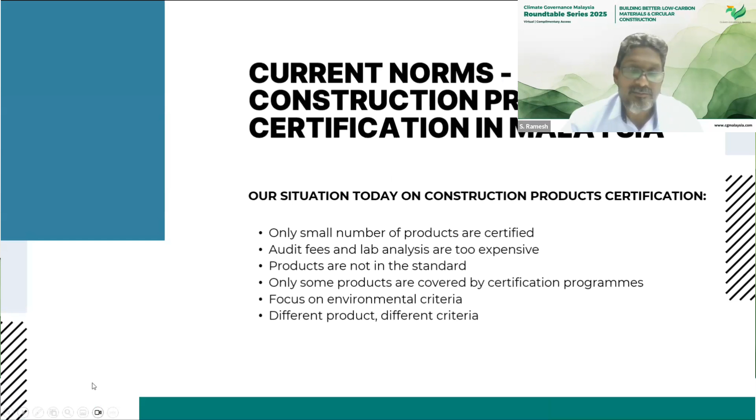Okay, so before that, we try to look into the overview picture of the construction product, where we are now.

In terms of certifications in Malaysia right now, there are many, but in terms of product certification, the numbers are quite small, because few products are being certified, and also the audit fees and lab analysis are too expensive, meaning industry players cannot afford to have their construction products certified. Also, there is no standard that specifically looks into construction products and certification programs.

So these are the things that arise when the industry looks at environmental and social governance, with focus on environmental criteria being an important element we need to look into. With different products and different criteria, there are some jumbled issues that we need to cater to one by one from the government side.

These are, I think, the quite pressing issues we need to solve starting from day one. So coming to these issues, CREAM as well as CIDB, together with industry players, have taken the step to introduce a green product certification that does not overlap with MyHijau or other certifications, but complements each other.

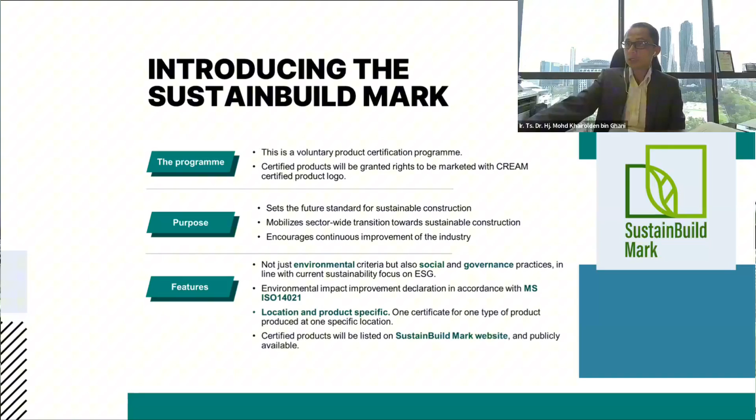So this is one of the initiatives we are looking for. The second one actually we look into the opportunities, a gap opportunity in embodied carbon. We are currently doing some studies that look into embodied carbon itself to support circular construction. Before that, we came out with some gaps and opportunities derived from fact finding from some of the studies.

We can see that in terms of local embodied carbon, right now there is no available standard. So these are some of the opportunities that we can look into. The second one is in terms of database. Database sharing is another challenge for industry players, because we have to rely on international databases, so it's quite limited in terms of a local database for embodied carbon.

In fact, we have done a few sessions with industry, and many of them say that getting the data is quite difficult to compile. So CREAM and CIDB come into the picture to help facilitate the embodied carbon database.

The third one is in terms of regulation. As of now, there is no mandatory embodied carbon reporting yet. So this is a time for us to look into some standards that we are going to develop, and also some incentives that the government tries to offer to the industry.

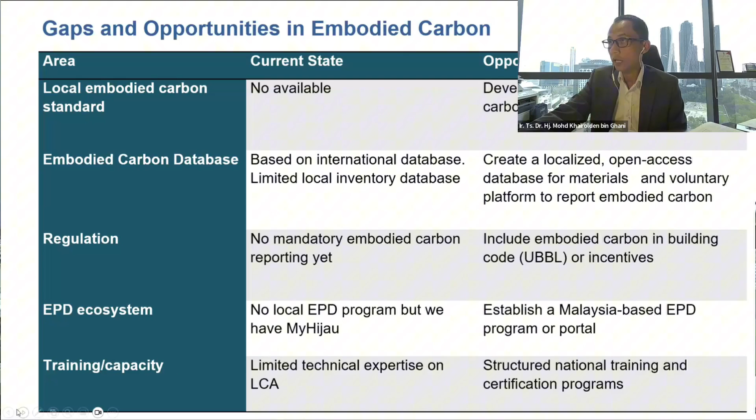So maybe not everyone is aware of this - CIDB has published what we call the embodied carbon inventory database since 2021. That embodied carbon inventory has been published on the CIDB official website, and in fact on the CREAM website as well. You can download it and use it as a reference.

Compared to the 2021 version until the version 2025, there's a lot different. We have just completed updating the inventory listing of data. Compared to 2021, where we had just 300 construction materials, as of now there is an incremental increase in numbers, now under 629 - almost double the increment in terms of listing of construction materials.

We can see that the construction material listing is progressing well in terms of numbers. In terms of building elements, in 2021 we managed to get 200 elements, but now we have more than 440 building elements, all completed already. We will update and upload to the CIDB platform for reference once we get the green light from CIDB. So the embodied carbon inventory data update is completed already in terms of all the information.

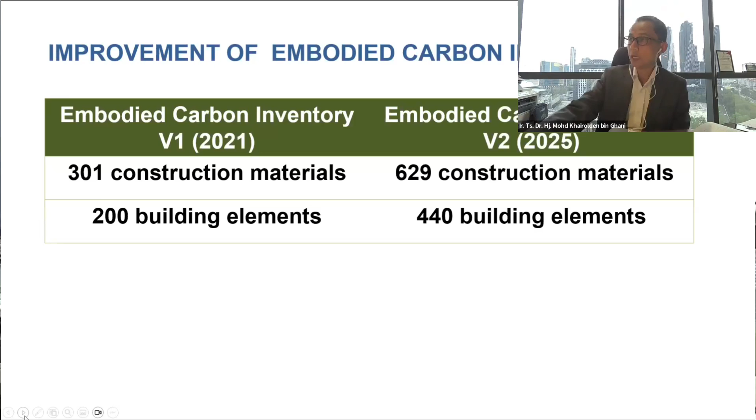Okay, let's go to the next one - some more of the effort that we have undertaken right now. The development of the embodied carbon calculator - right now the embodied carbon calculator is, I would say, the first of its kind in Malaysia, developed as a digital calculator.

At the end of this study, we will have a guide that could assist industry players to calculate how much embodied carbon is generated, just by clicking and inserting data from the database. Right now we are putting in all the codes, algorithms, for digitized calculation. This is in progress, and by end of this year we hope to complete this development, then get validation with the industry to see how it works. As for now, we have tested one pilot project and so far it's good to use.

We have also benchmarked with international bodies, for example the Institution of Civil Engineers and RICS, Royal Institution of Chartered Surveyors, to look into how they develop embodied carbon calculators. But as for now, their embodied carbon tools are just in Excel format. So in Malaysia, we are trying to digitize that calculation so it's more easy and user friendly.

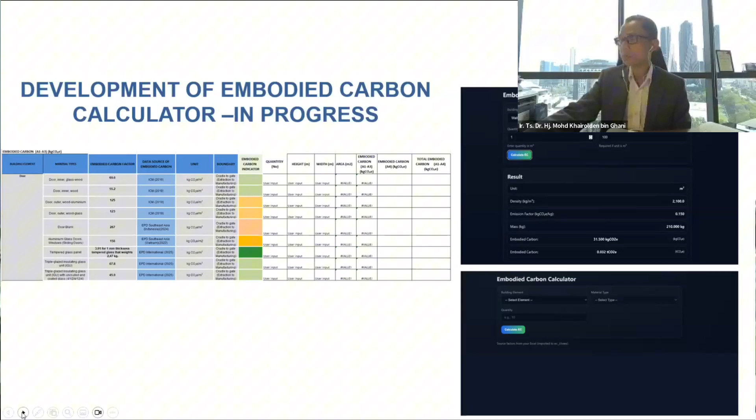So for the way forward towards circular construction, there are three things we need to look into. First, we have to accelerate green certification products across the industry. This is a journey, the voluntary scheme is not mandatory right now, so we have to promote the SB Mark, which is due to be launched end of this month during the International Construction Week at MITEC, Kuala Lumpur. This will be a milestone for green certification products, pushing the industry towards sustainability.

The second thing is to leverage the carbon calculator and waste data for better decision making. As I mentioned, we have efforts looking into embodied carbon, a few reports on greenhouse gases, the embodied carbon database inventory, and we're developing the carbon calculator guide. These things will help the industry look at the whole life cycle based on planning and material selection.

The third thing is to come out with some incentives. We do offer incentives for those registering for the SB Mark certification program, but we need broader incentives from the government itself to support the industry players with sustainability programs, waste regulation, and action plans. In terms of policy alignment, we have to align both the industry and government perspectives when looking at the strategy as a whole.

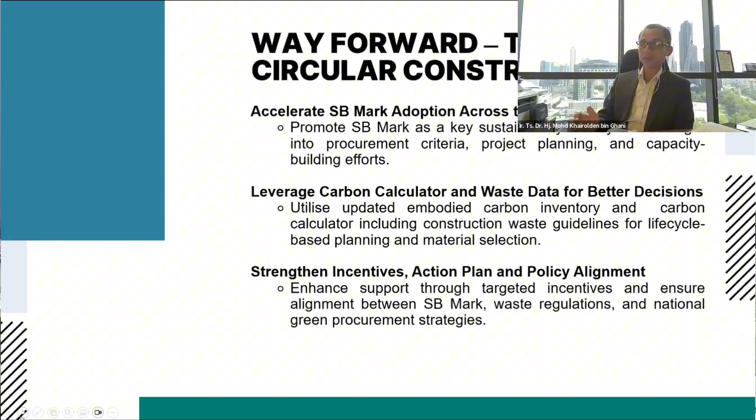So that's some overview of my presentation. I think that's all for my side, right, Ramesh? I hand over to you.

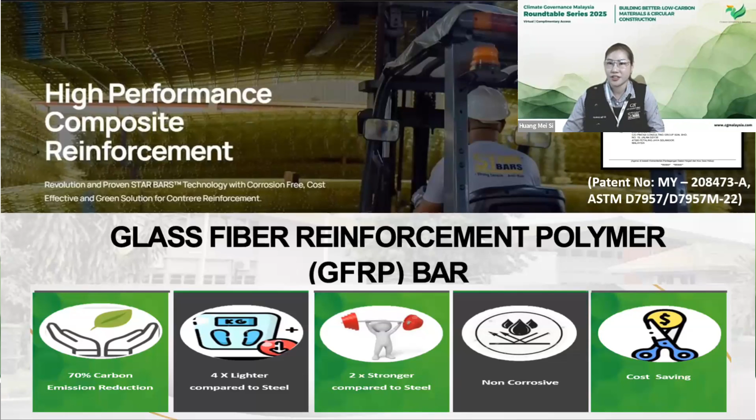Conventionally, this material is used in aircraft, high performance cars. Now cruise ships are a trend. If you hop on an aircraft or cruise, just take note - it is not made out of steel, it is FRP material. This material has been in the industry for the last 80 to 100 years, in construction for the last 50 to 60 years. That's why the code already exists.

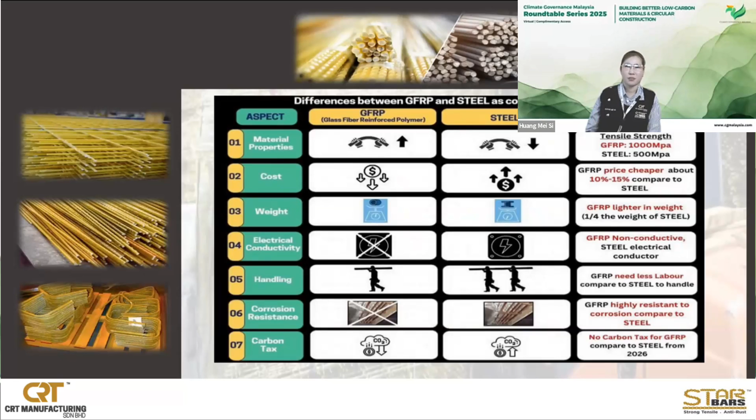Lastly, let's talk about carbon tax. Carbon tax is just the acceleration and incremental urge for us to reduce and help impair carbon emissions. So how bad is the carbon emission from the construction industry actually?

Construction industry accounts for 38% of carbon emissions, data by International Energy Agency. Concrete manufacturing accounts for 7%, and steel accounts for 6.7%.

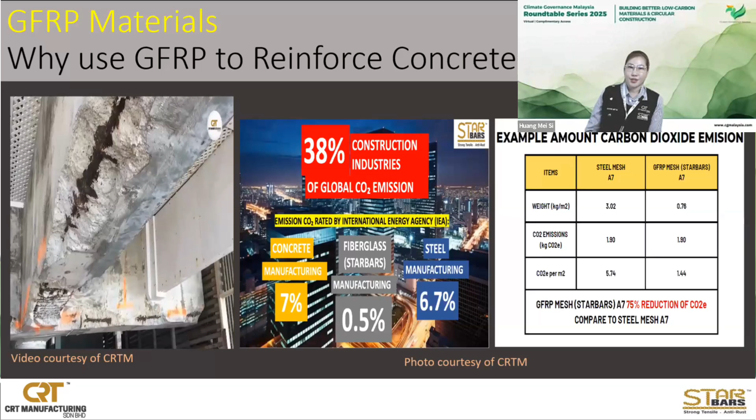Fiberglass has the lowest emission in the world - not just combating corrosion, but when it comes to carbon emissions, we have targets for certain industries. The biggest carbon emitters today in the manufacturing sector, for example, are steel and cement. We're talking to the Ministry of Finance, and the Prime Minister has already announced that next year we will start proposing carbon tax.

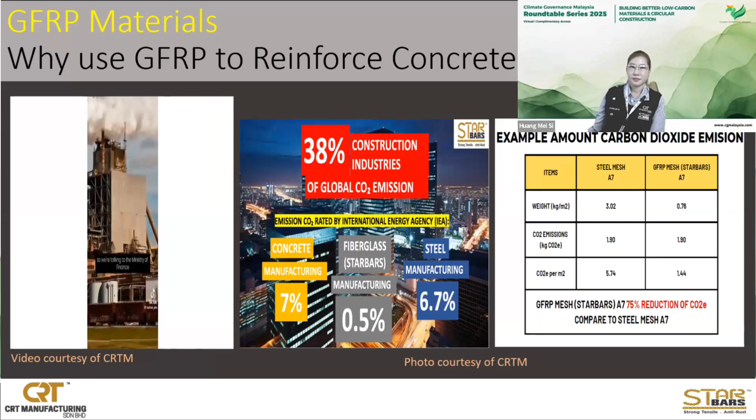So let's look at the carbon emission scope 1, the table on the right. If you look at the weight perspective, same size A7 - if your contractor terminology is common to you, A is a spacing of 200 by 200, 7 is the diameter, similar to other countries. The weight per piece, or kilogram per square meter, for steel is about 3.02. For GFRP Starbars, it's about 0.76.

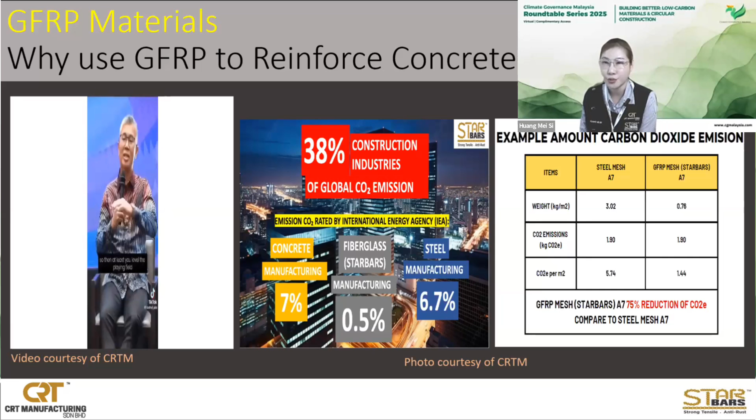If you look at the carbon emission per kilogram CO2e, steel and GFRP mesh both contributed 1.9. However, the 1.9 CO2e applies to steel for 1 piece, while the 1.9 for GFRP applies to 4 pieces. Therefore, if you compare 1 piece of steel to the same size GFRP, GFRP emits 75% lower compared to conventional steel.

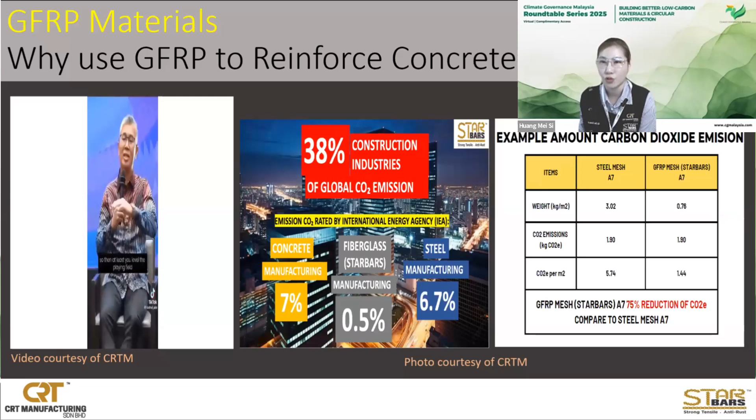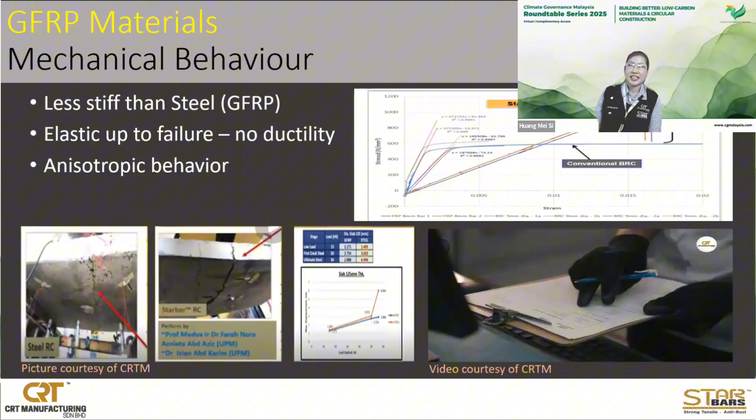This material, compared to steel, has lesser stiffness, low E values, and is linear elastic up to failure with no ductility, and is anisotropic. Looking at the stress-strain curve, the blue line is steel, which yields at 500, whereas the orange and purple lines are GFRP. The stress point is 2 to 3 times higher, but it isn't ductile.

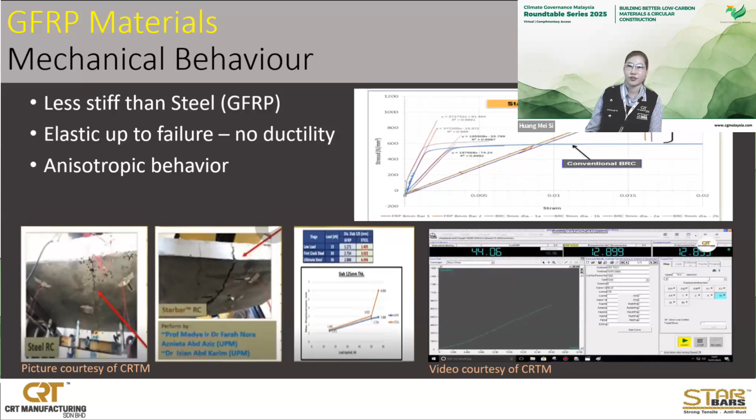If you have a lot of concern about this material's ductility and durability, let's go to the next slides. I need you to hear this video out.

This addresses a lot of the misconceptions out there. People are saying, hey, fiberglass rebar is brittle, it doesn't give you the warning, it doesn't do this, it doesn't do that.

But we have done a lot of testing. This test has been done at the University of Concordia. This is a simple beam, 16 feet span from center to center of the support.

This is a 300 millimeter, or a foot long, high regular concrete, 6 inches, with 2 pieces of number 5 rebar running at the bottom. We put this under cyclic loading of 2 hertz, 2 cycles per second. The loading on top is 25,000 pound force, or 110 kilonewton, which is 1.7 times service load.

This video has been recorded after 2 million cycles. We did the same test with steel, and it only lasted less than 20,000 cycles. See, 2 million cycles for GFRP versus 20,000 cycles for steel. This material performs 100 times better than conventional steel.

Next, we are talking about the application of GFRP into reinforced concrete. We have done this thanks to our supporters.

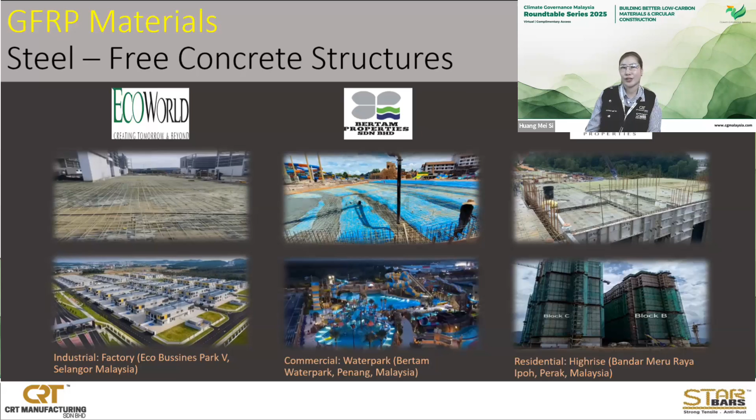This material is even more superior for marine chloride applications, de-icing chemical applications, more sustainable bridges, and electromagnetic transparency applications like MRI facilities or airports where radio signal disturbance must be avoided.

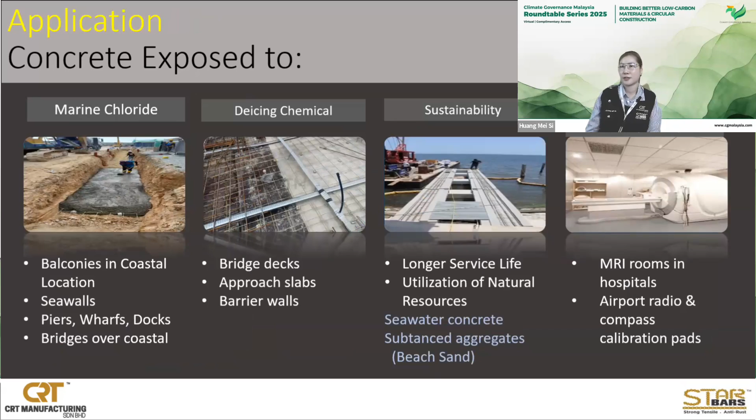This material is a good alternative to reinforcing concrete. Later I'll come to the codes and elements usage. You cannot just limit it to residential, industrial, or commercial. For those who build MRT, it can be used where your tunnel boring machine cores through the diaphragm wall, since it's easier to core through GFRP compared to steel. At the same time, my competitor MST rebar has used this in critical piling as well.

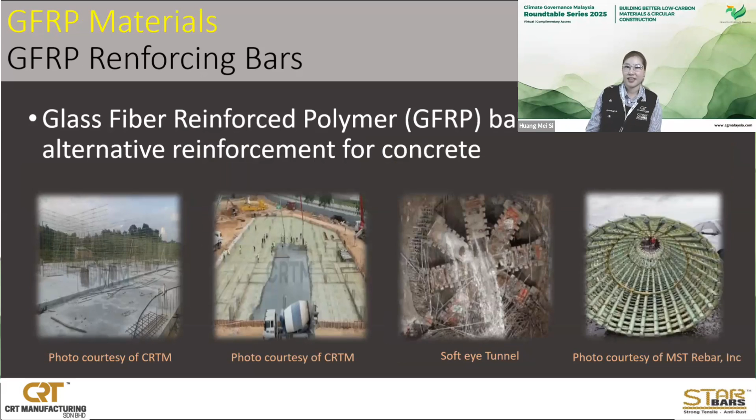Next, these are more interesting to you: cost savings, material to material, assuming the same sizes.

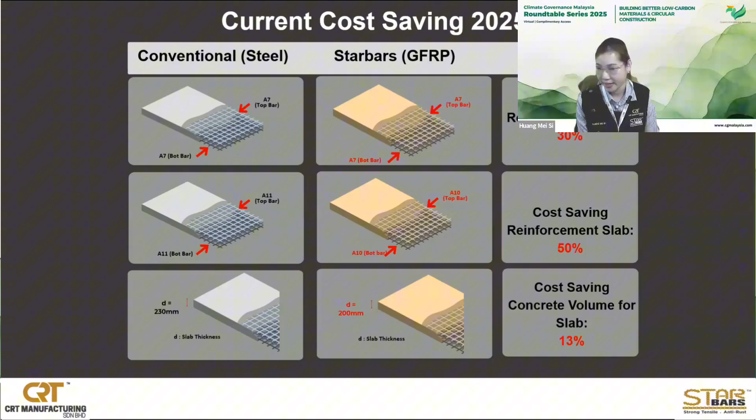Let's go a little more technical, the 3-legged compliance. This material, you need to have a product certification license strictly from SIRIM, ASTM D7957. If it doesn't have SIRIM certification, don't buy it, because this is the spec. ASTM D7957 has the necessary specification, testing, compliance, number of samplings, and audit requirements.

Then, dear civil and structural engineers, you need to comply with BS EN 1992-1-1 version 2023, not the 2004 version, because the annexes start from page 384. You are able to design this, or use the American code, specific code ACI 440.11, which is synchronized with the steel design code ACI 318.

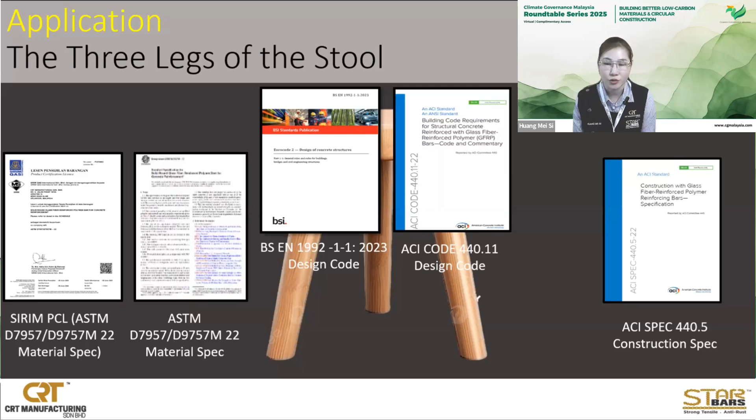For application at site, you need to comply with ACI spec 440.5. It's not like you can arbitrarily decide how much lap length you like, allow me to educate more. Conventionally, you're still using BS 8110, I know, and the old Euro code. When it comes to GFRP, you need to follow the new Eurocode.

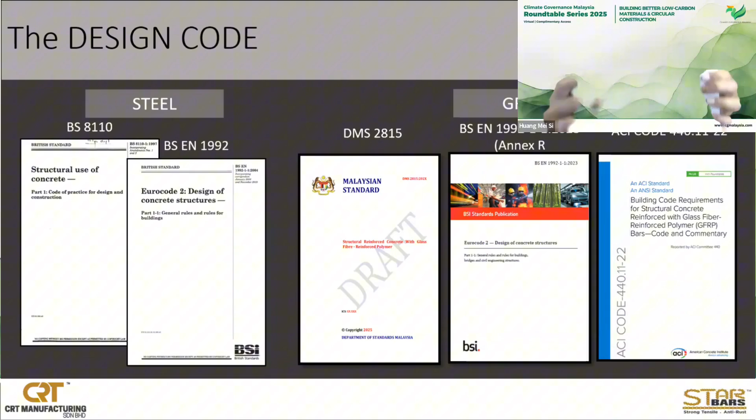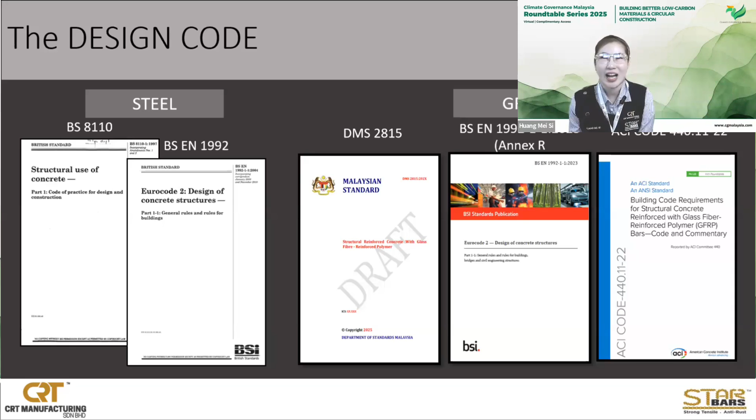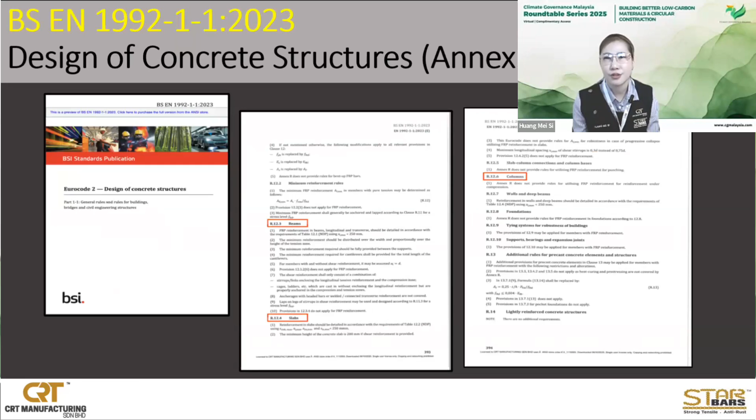So for Eurocode EN 1992, the latest revision, page 384 onwards, if you look at the design criteria, it covers all structures - beam, slabs, column, foundation, and so forth. If you go to the American code, most of the chapters, you have to follow the relevant chapter for the right design for the structural use.

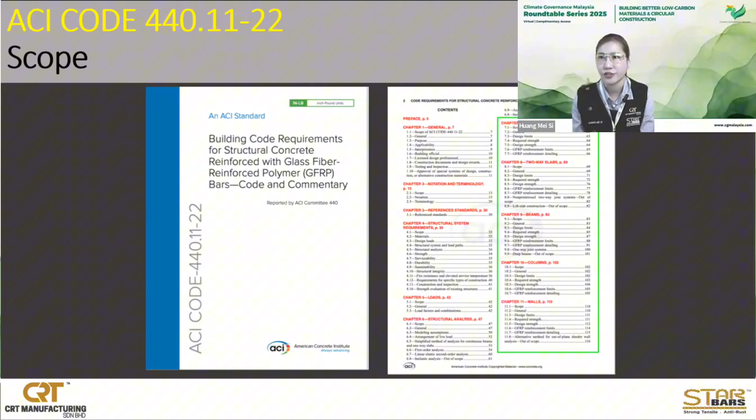So the construction specification, we need to strictly follow ACI spec 440.5, which will include strictly in our method statement.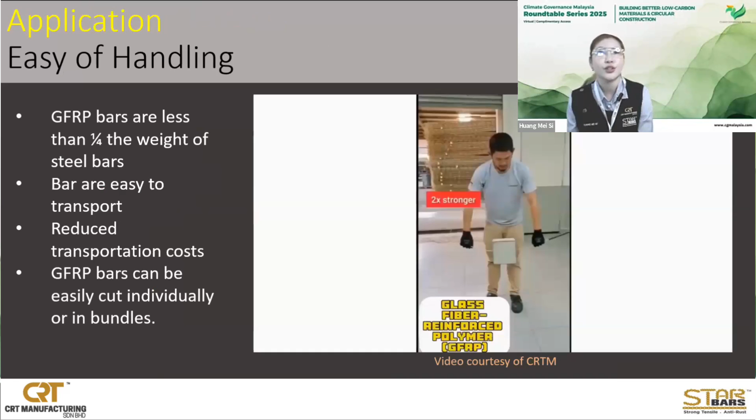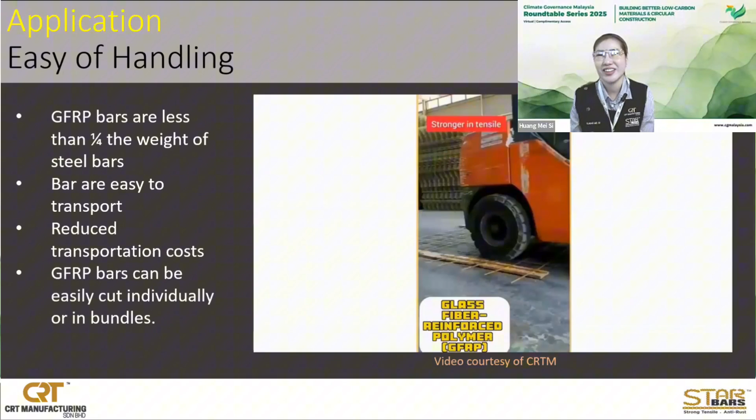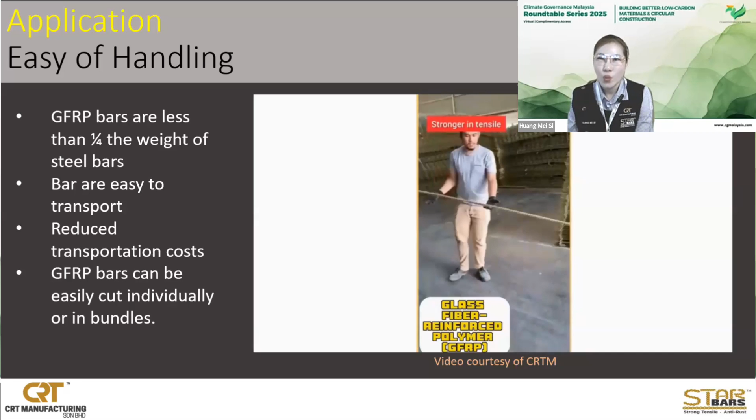So to ease handling this material, play the video. This material is a quarter of the weight. You can step on it, it's more durable, it bends and flexes back. So unlike conventional technology, it looks like plastic, looks rotten, but it's stronger than steel, easier to handle compared to steel. This is just to show you it sounds like steel, works like steel, no special handling needed. In fact, it's easier to cut as well.

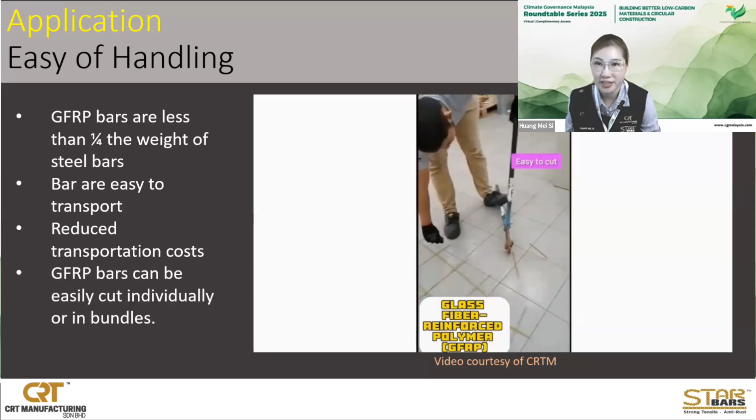So to reduce wastage at site, you can actually order cut to size from us. We will issue you the shop drawing. You can work on it, bend it, 2 people carry one piece. You won't see conventional steel able to do this. 500 pieces of BRC, British Reinforced Concrete, to unload the steel takes 2 hours. To unload GFRP, it takes only 35 minutes.

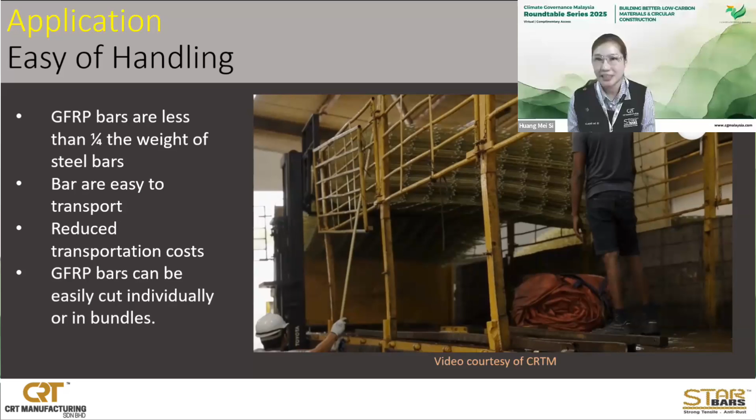So for storage and handling, this is from our actual site. Nobody is going to steal it anymore because they cannot commercially recycle it easily. However, with special processes, it can be recycled. So it solves one of the advantages that critically saves your pocket. Number 2, it does not rust or corrode at site, so you do not need to fear or worry the quality will impair at site.

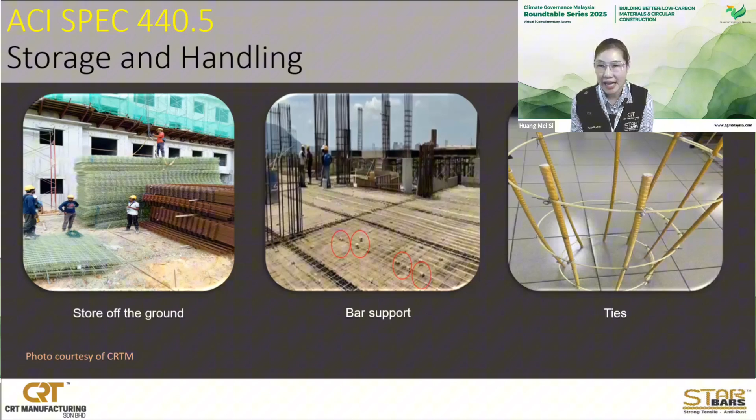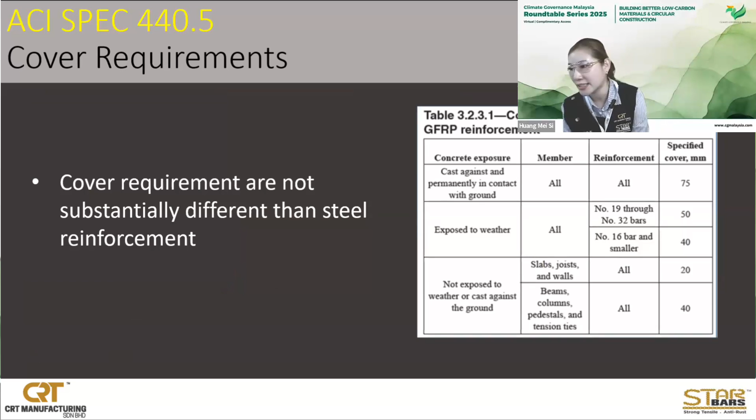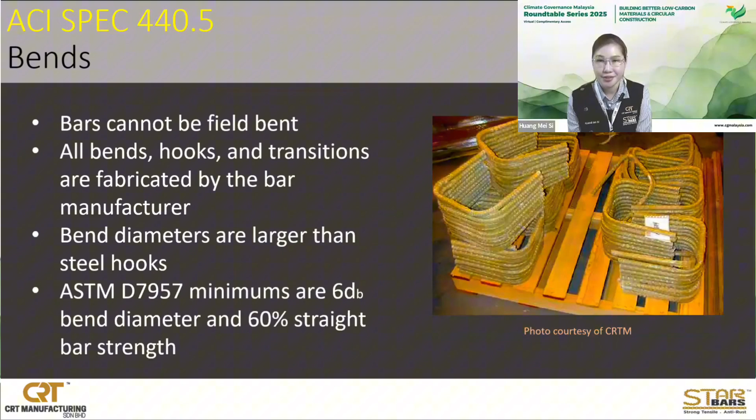The major difference is that this material cannot be easily bent at site. So in the present moment, sites are hybriding it with steel. So in areas that need a lot of bending, steel is still advantageous.

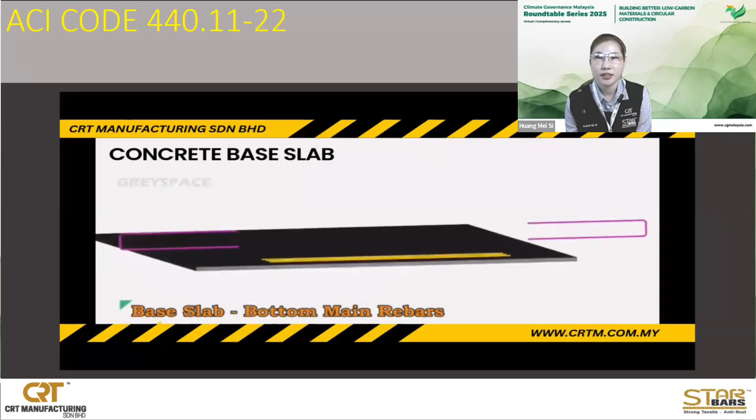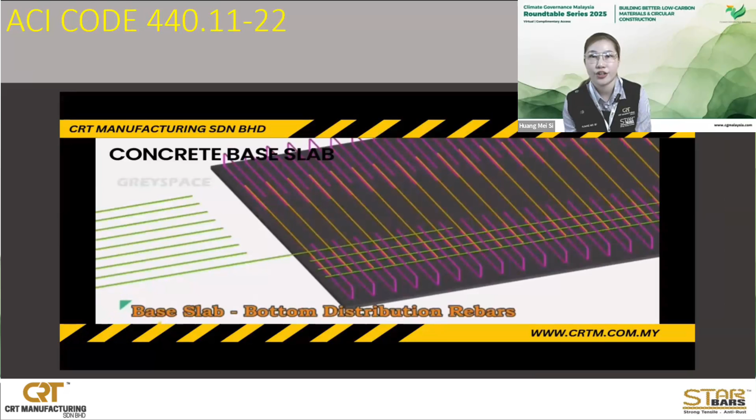So if you look at this video, the yellow color bar is the cross wire of GFRP. This purple color U-bar is made out of steel. So you cast it along your panel, and then there are distribution wires, which is the green color bar. Subsequently you pour your concrete. The green color bar can be GFRP as well. So only the anchor, T-bar, L-bar, C channel is made out of steel.

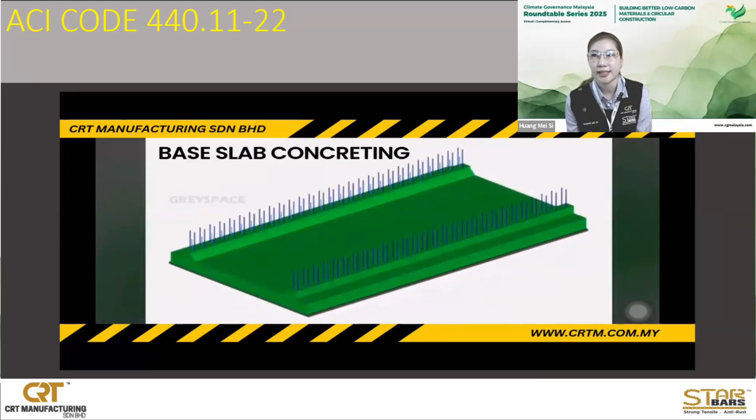The lapping requirement is still the same, 40 multiplied by diameter. You can tie with conventional wire tie. Next, designing with the codes - so this is just one example.

So if you talk about longevity or durability, if you compare the Eurocode steel design versus FRP design, you have to control crack control and serviceability well. You are able to have a concrete saving of 15% or reinforcement saving of 22%. For more detail of checking and design, you can participate either in IEM Negeri Sembilan next Tuesday, or 28th of November at the Association of Consulting Engineers Malaysia. I will give more technical calculations like this.

Fire rating is everybody's concern. So if you look at Eurocode practices, say 2 hours fire rating, you need 120 mm to pass. We tested at BS 476, 78 mm already passes 2 hours fire rating.

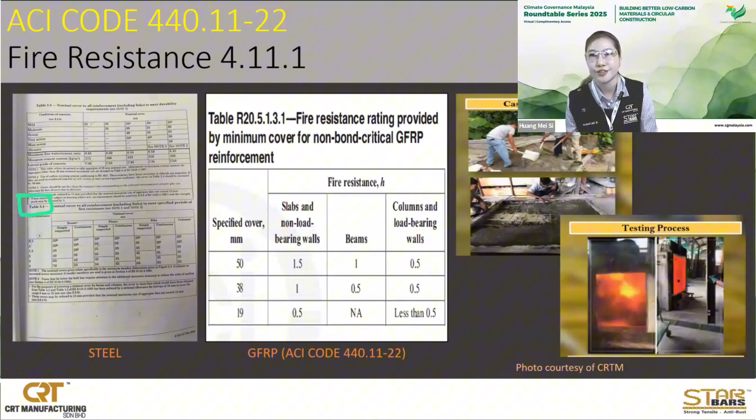Otherwise, refer to the code and the commentary. They are necessary and recommended, complying to the codes and UBBL for fire resistance design. Okay, next, maybe this rumor might cross your ear.

If this should cross to you, just give us a call. There are rumors outside saying that using StarBars now, after a while it cracks. Probably from what we observe from our sites in Tanjung Malim, Kapar and Subang, the area that uses steel, the left photograph, cracked all the way without loading. The area that uses StarBars, if you look at it, there are 3 stacks of pallets, 3 tons, and it's only derived minor surface cracks.

And there is another site that actually cracked at the slab. So we requested the site to do a coring test. The core results came out, the concrete strength did not achieve the design strength, and also the thickness did not achieve it, about 30% off. So mainly, this was primarily due to workmanship.

But StarBars is okay. Should you come across any of these in the future, do give us a call. We can arrange a private session to verify and clarify these things to you as well.

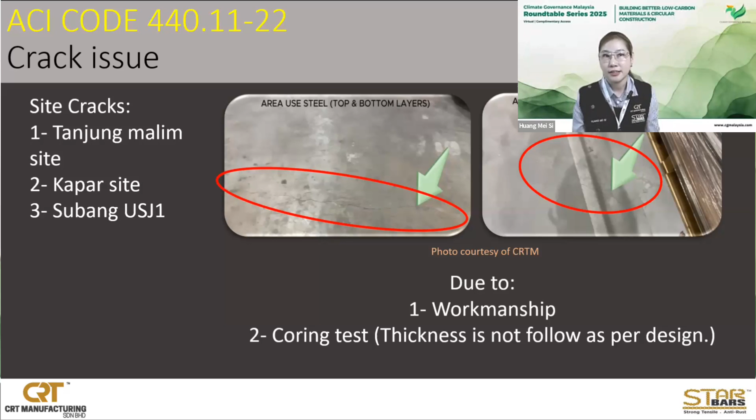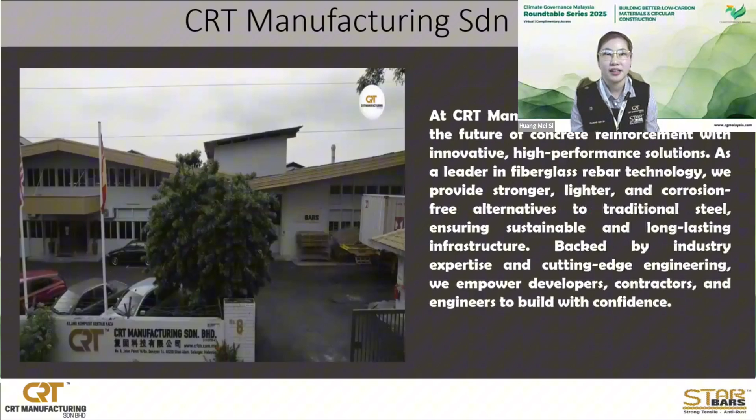So next, CRT, Composite Revolution Technology. This is our manufacturing plant, one and only in Malaysia, Section 16, Shah Alam. Standard sheets, this is what you see. We can do cut-to-size to have no wastage for you. So this material is very lightweight.

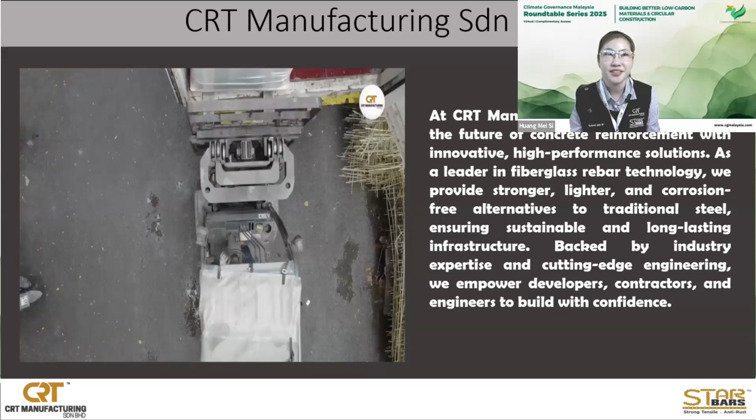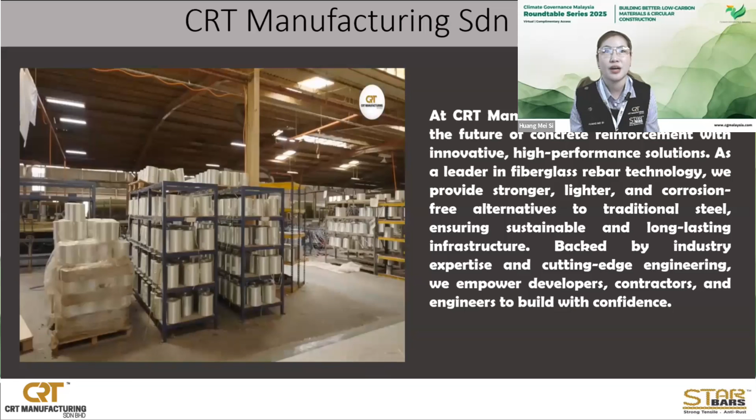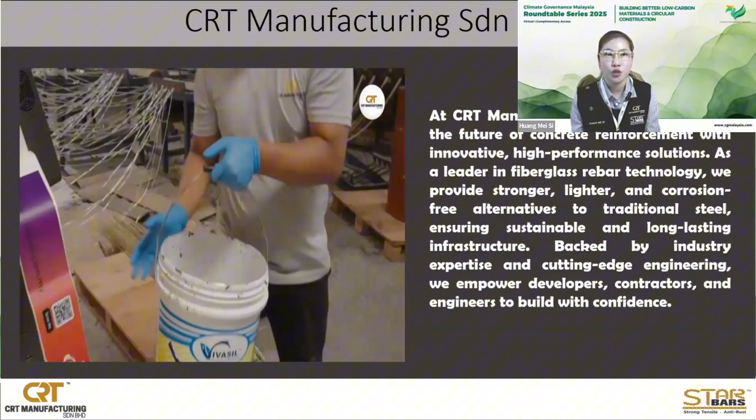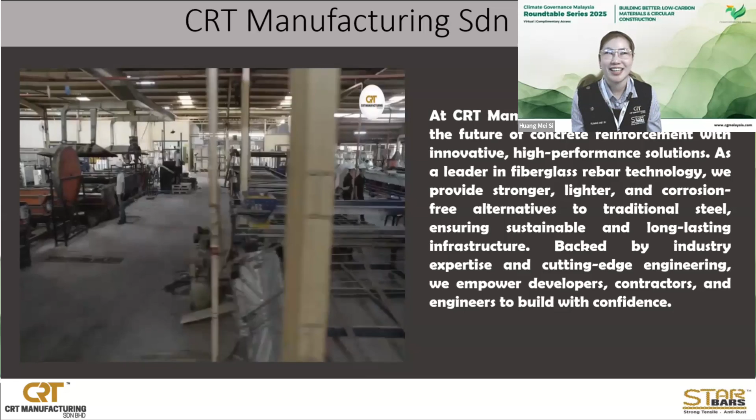So this is our process, real processes. Actually, I wanted to do it live here so you guys could see it in real life, but it's okay. You've got our contact, arrange a private session with us, and we can bring you around as well.

So these are our matching processes, directly from the raw material to the end finished goods. So probably a piece of these standard sheets, we do it faster than your A3 printing in your office.

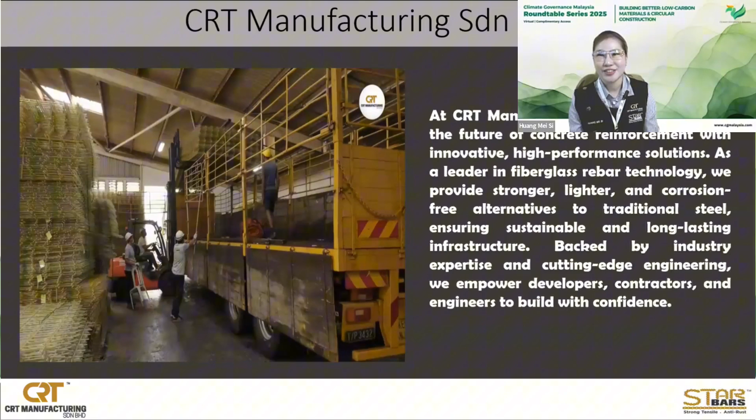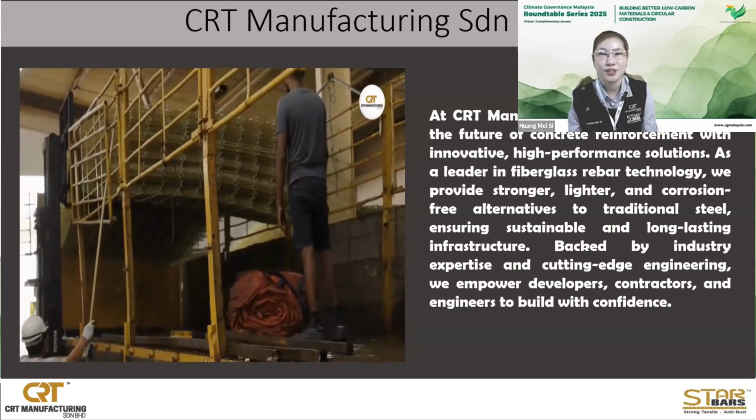Next, so for this material, we have sufficient green certification: MyHijau, CREAM ISO 14067, MGBC, GBI, and a recognition token from GreenRE. For product certification, we have 2, both from SIRIM. At the same time, we are locally patented and MySTI, which is enacted in the new Pekeliling to encourage the adoption of local design products.

We are not OEM from any first world country. As I mentioned, I'm one of the inventors in our team. Do support us as a local invention and commercialization.

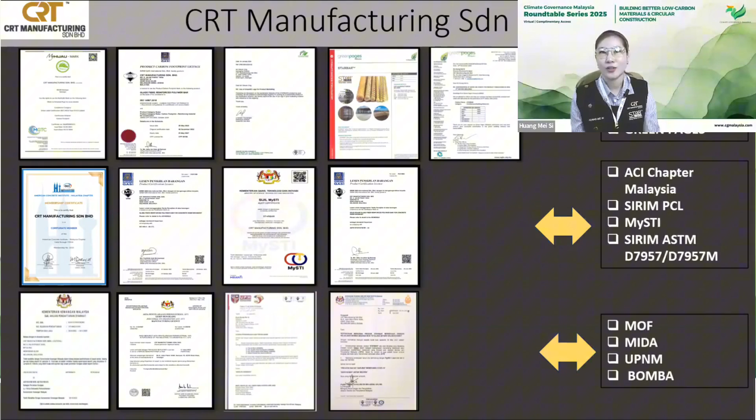Next, so to use this product, thanks to CIDB for the good support. If today you Google CIDB Starbars, you are able to see us on the website, and some of their workshop tours, you can see I'm one of the speakers. I know the photograph looks different from me, that was me many years ago. So this is the letter supporting us by CIDB.

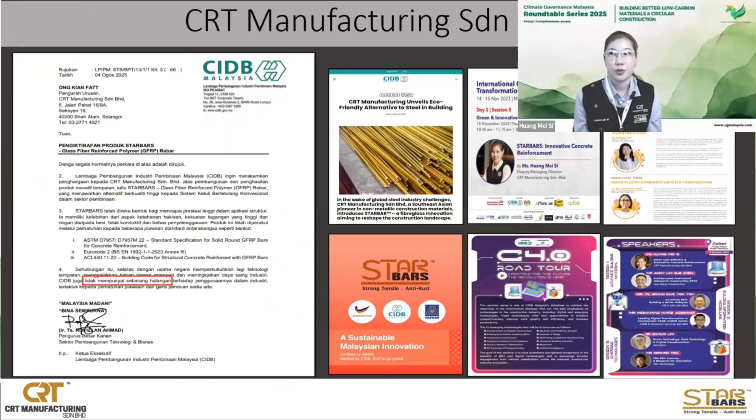At the same time, all the technical workshops we conduct are through the Institution of Engineers Malaysia, Board of Engineers Malaysia, Institution of Civil Engineers Malaysia, upcoming Association of Consulting Engineers Malaysia, as well as Surveyors Congress, to have the right quantification and costing.

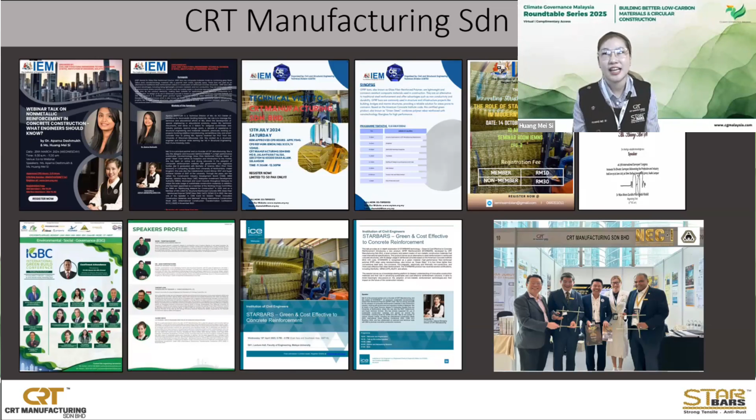Principally, that's it from my side. I'm a co-founder and one of the inventors for Starbar. Here is my contact, feel free to drop me a WhatsApp or give me a call at any time. I should be able to feed you the right information the soonest I can reach out to you. Have a good day. Support local technology, support Malaysia, let Malaysia pioneer for the world. Thank you.

I just wanted to wrap up saying, you keep on saying 'let me educate you.' Yes, indeed, it's educational, informative, and a very technical talk from you. I pick up this: it's an alternative material, Malaysian made by Malaysians, made in Malaysia by Malaysians, and you keep on marketing that. I think it's a timely reminder that we have alternative material. Thank you for that sharing. I can feel your little bit of pain. Maybe we can share later on.

No, because I can feel that pain. Why keep on marketing it? It's Malaysian made. Why don't you guys look into it?

Thank you for that sharing. I felt like I went for some engineering classes for a while, looking at all that. Thank you, ladies and gentlemen. I know we are on virtual, but do give a round of applause for both those speakers.

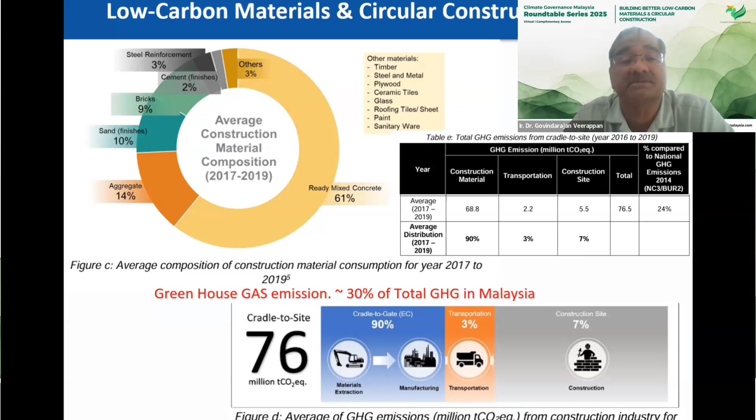This is what they call cradle-to-site and all that, out of which I think 90% actually comes from construction materials. I think that's why they emphasize low carbon and circular construction, because that's how you can minimize these gas emissions.

Having some problems here—okay, globally everyone can Google this and find out. But the point I'd like to make is that cement production, the main component in the construction industry, the manufacturing uses almost 2% of world energy, producing about 5 to 8% of CO2 emissions.

To give a figure, 1 ton of cement production requires 2.7 tons of raw materials and 124 kilowatt hours of power. That's a major component of materials in the building and construction industries. So basically, we need to find materials that can produce low carbon, and circular construction plays a very important role in ensuring materials stay within the same loop for reuse.

So the table below here gives an idea of major construction materials. I think Ms. May already elaborated on the steel reinforcements and CO2 emissions, so I don't want to repeat that in detail, but focus more on the concrete industry and how we can minimize emissions. Earlier I mentioned some say 5%, but it's actually in the range of 5 to 8% of CO2 emissions produced.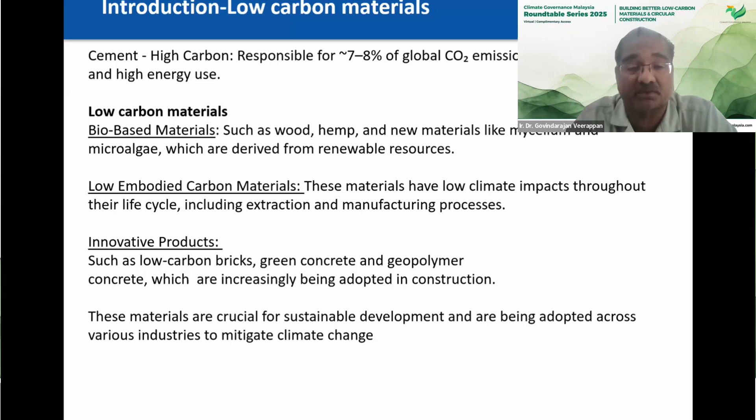If you can produce 200 megapascal compared to the conventional 30 to 50 megapascal, obviously you can reduce the thickness of the materials, and the industry will directly benefit. I think Dr. Khairolden did mention a good effort they're putting into the calculator.

But I just want to show these two figures to show what conventional cement actually produces in CO2. It's about 0.74 kg of CO2 produced for every kg of cement. Compare that to GGBS, ground granulated blast furnace slag, a byproduct of steel - that's only about 0.083. So you can see the difference.

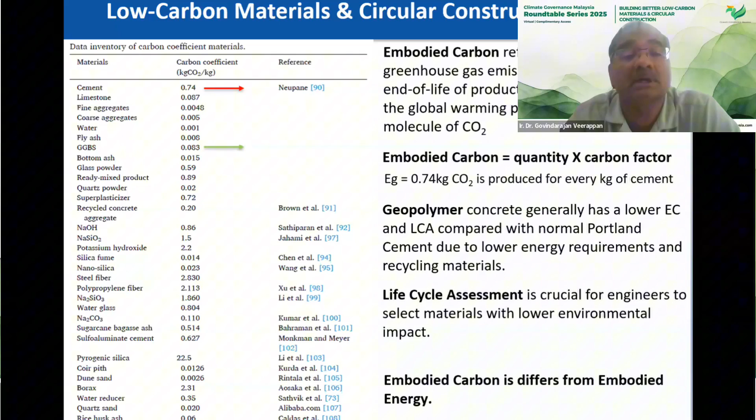So these are the materials you need to combine to have a sustainable or low carbon cement. Why low carbon construction materials? I think the earlier speaker also spoke about this in depth - different materials, if you can recycle or reuse them, combinations of materials will definitely benefit the entire construction industry.

I think the new regulations are interesting too. About last week I was listening to BFM and they were talking about the carbon tax they're going to implement next year. I'm sure moderator Mr. Ramesh can elaborate on that. We're all very eager to know how they're going to impose this carbon tax, which in a way is a very good move, because without enforcement or regulations, I think we will never move into sustainability.

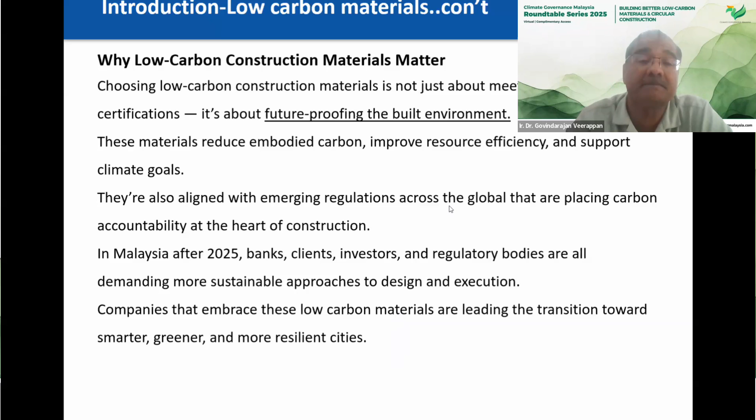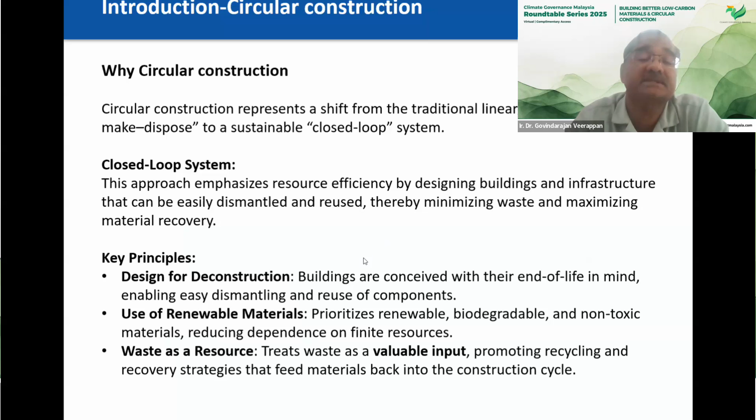So these combinations of low carbon materials and circular construction are all tied together. If these two things can be utilized by the construction industry, a lot of things can be minimized, even waste going to the landfill - some byproduct materials that are currently dumped can be reduced, giving us a cleaner environment.

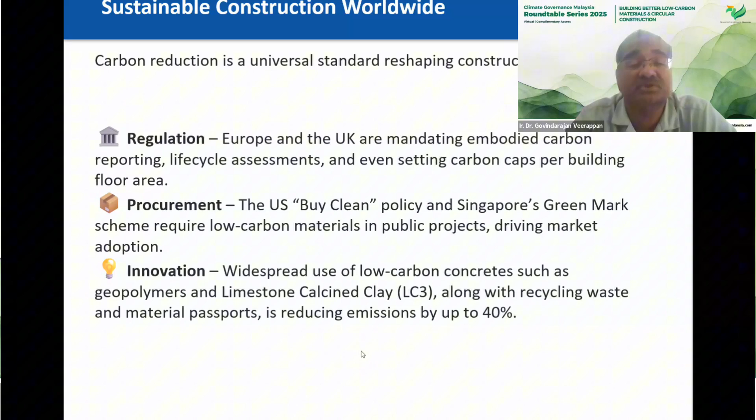Now I'm going to brief a little bit on my research. The development of low-cost, low-energy cement, where we use waste paper sludge ash, a byproduct from the paper making industry, combined with GGBS, ground granulated blast furnace slag. We blend this into concrete products, then introduce some other materials.

So why were these materials selected? Before I even started this research, some research was carried out by my University of Glamorgan. One of the things is that the paper manufacturer collaborated with the university to find an alternative for these products, because there's a huge tax imposed to dump them.

For example, in the UK, 5 million tons of waste paper ash was dumped in landfill, and they have to pay a very high amount to dispose of this material. So they are forced to find alternate products to utilize. That's how the research came into the university's mind.

End of the day, this research is not very straightforward. Many people ask me what I'm doing for 3.5 years of research in this. Actually, for any product to come to market, you need very extensive R&D and test results to prove that this material is good in strength and durability. That's what we've been studying throughout my research.

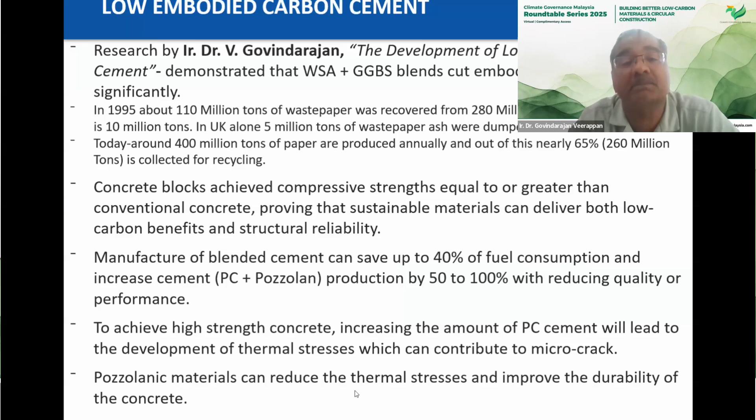Many times the concrete actually cracks in the early stage during the setting time, but that's not noticed. If you're not noticing, the micro crack becomes larger and larger, and one day the cracks become serious to the structure.

For some of you industrial engineers, you'll understand what this slide is about. The pozzolanic materials themselves have two divisions: one is natural pozzolanic, another is artificial. The natural is volcanic ash - pumice is one of the best natural pozzolanic materials. The rest are fly ash, GGBS, silica fume, our waste paper sludge ash, rice husk, and palm oil shell.

Rice husk and palm oil shell have been utilized in research by our local industry. Professor Dr. Manan used to be at University Sabah, then moved to University Sarawak. He has done quite a lot of research on these products as well. We are working on alternate materials, and some universities are working on this too.

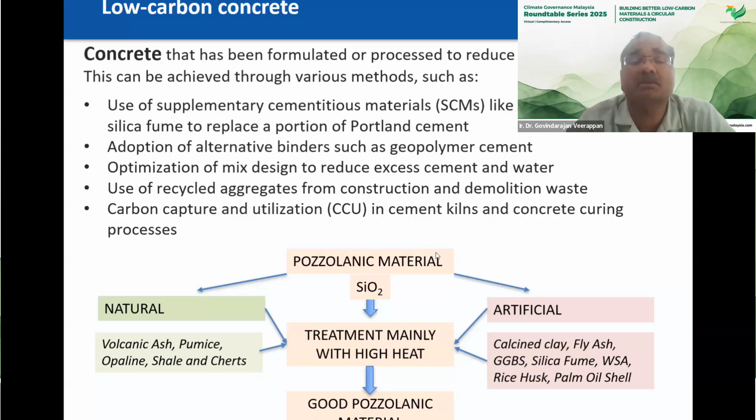The combination of these materials with Portland cement becomes a geopolymer - that's the new revolution type of cement we are using. The chemistry and mineralogy go back to three main components: calcium oxide, aluminum oxide, and silicon dioxide. The proportion of these will give you rapid hardening cement, sulfate resistant cement, or high alumina cement - everything comes from this triangle mineralogy of cement chemistry.

Those who want to know more on this can contact me separately after this - I can give you a lecture on it. That will probably take a few hours.

So I'll move on. Interestingly, when I was doing my research in the UK, the Second Severn Crossing, the connecting bridge between England and Wales near Bristol - the concrete they used to support the pier was actually 70% GGBS and only 30% PC.

Imagine, I'm talking about 1996 actually. This is the year I graduated from my university.

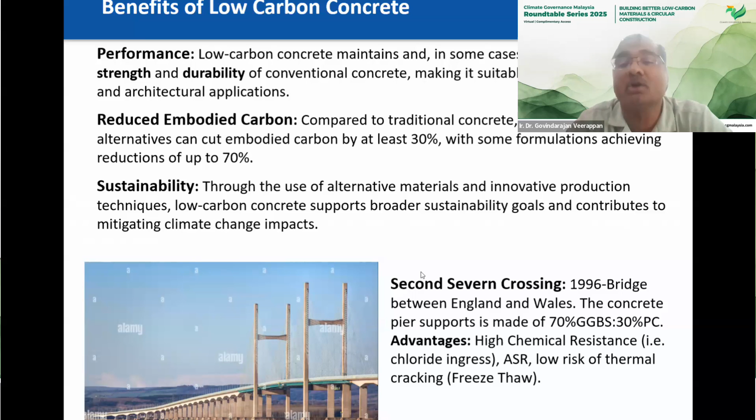So the use of this sort of low carbon cement has actually already been used elsewhere, and it's superior in terms of chloride resistance, high chemical resistance, also ASR, alkali silica reactions, and it's very important, it has a low risk of thermal cracking, what in the UK or Europe we call freeze-thawing. That means the temperature drops to minus, and then the summer temperature goes to 25, 26, or even 30 nowadays. So the concrete should withstand all these kinds of tests, I mean all kinds of environment, industrial environment.

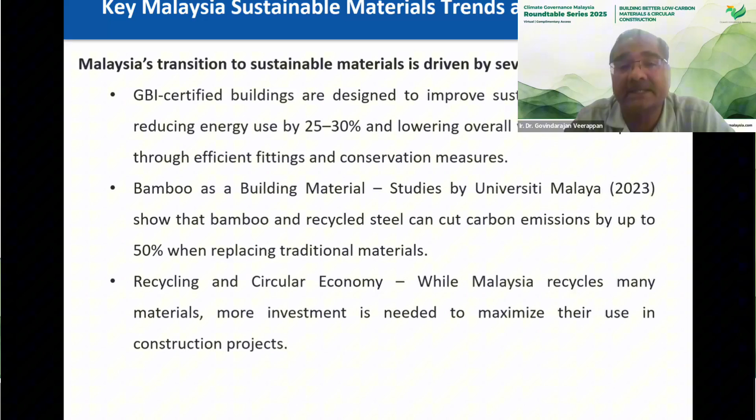Now, I think Dr. Khairolden earlier already talked quite a lot, or at length, on this in terms of Malaysia policies and all that. But I think we are there. I think they are working on some papers in terms of lowering the ground, I mean green building, greenhouse gas, and the studies are also utilizing bamboo and recyclings being studied elsewhere. Yeah, that needs to be continued.

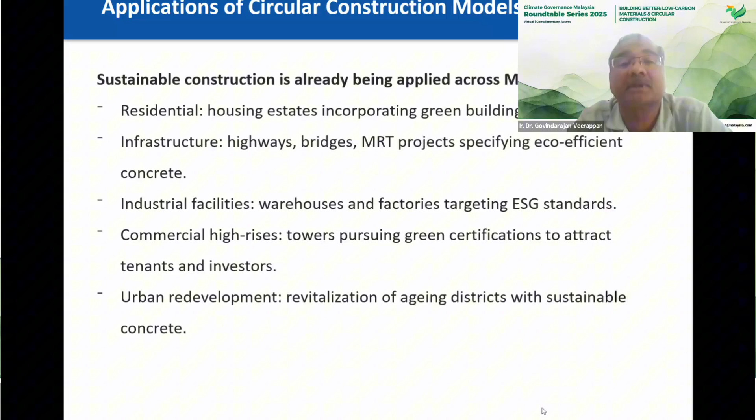So I think the challenges, again, I would say based on my experience, in order to make sure that the industry or the players use this kind of materials, there must be some formula to be, in a way, incentivized, or a little bit forceful to the industry to make sure that they use it, which is banking actually, using that formula. I think some sort of marks or assessment will be given in order to secure some loan from the banks if they have this kind of implementation in their companies.

And also I think without research by universities and all that, we may not develop, we may not go in depth.

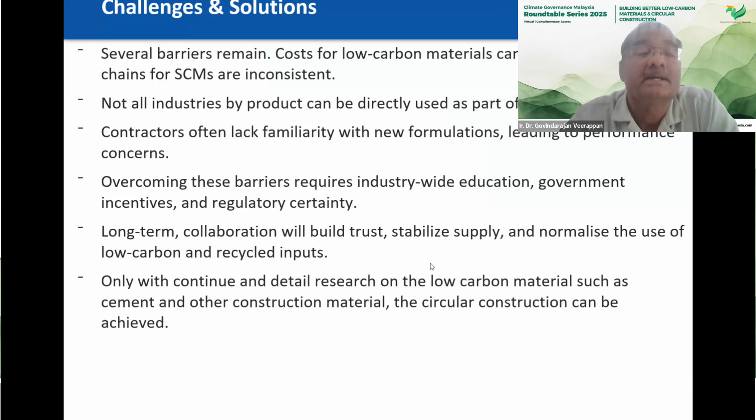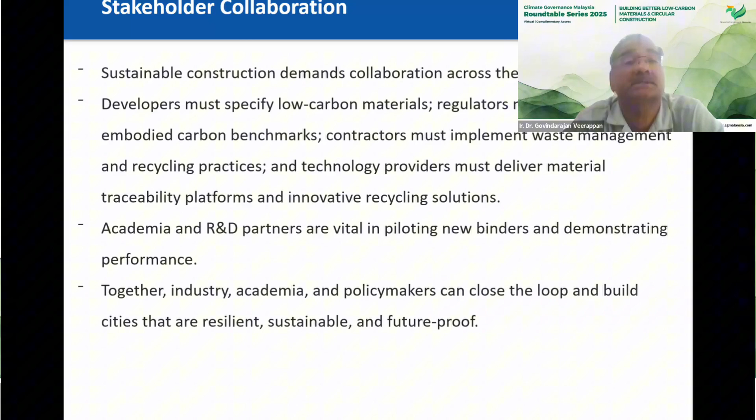Okay, so I think, like I said earlier, the stakeholders play a very important role here. They must join, or they must allocate some of their revenue for R&D collaborations with the universities, and of course they can have whatever invention, they can have a patent, and they can always market it, like Ms. May was doing. I think we need more of this kind of industrial players to come forward into low carbon and circular constructions.

So now I think one of the things that I picked up from our first speaker, Dr. Khairolden, was actually the UBBL, Uniform Building Bylaw. Now, being an engineer, a professional engineer, I think that's also another way we can include it, it's time probably to revisit our condition of contract or specification, for that matter, in IEM, JKR, CIDB.

They have a condition of contract, PAM, to include these low carbon materials and circular constructions. So it has to be specified in the contract, whereby the contractors can look into this as part of it.

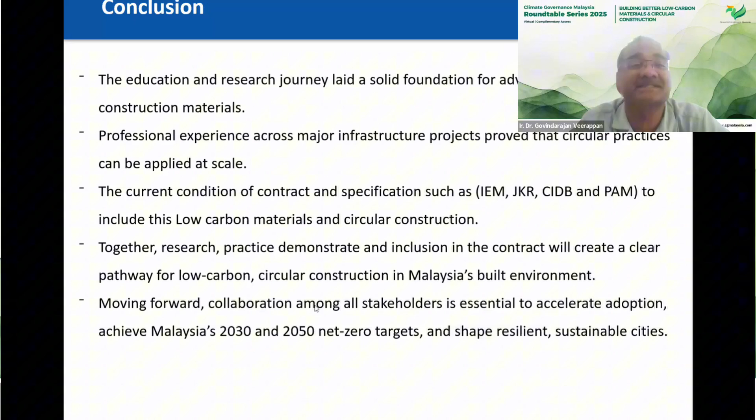So is this the topic now everyone is talking about actually? So it's good, there's the same time everywhere they are talking about that. So I finished my presentation.